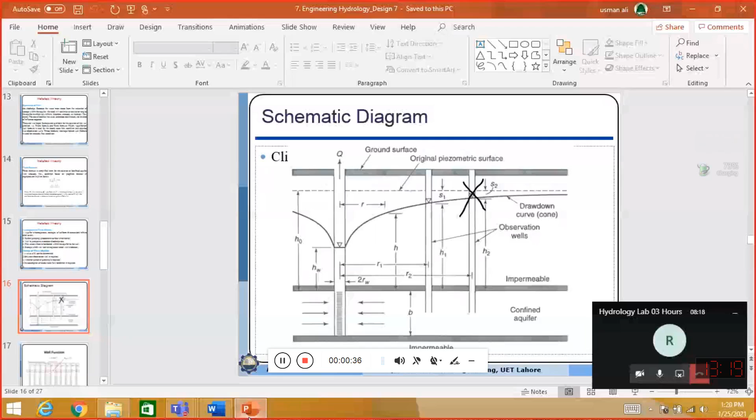Okay, so let us start with design number 7. Let me share the slides. Already these slides have been provided to you, so hopefully you have downloaded these slides mostly, and those who have not done it should do it at the earliest.

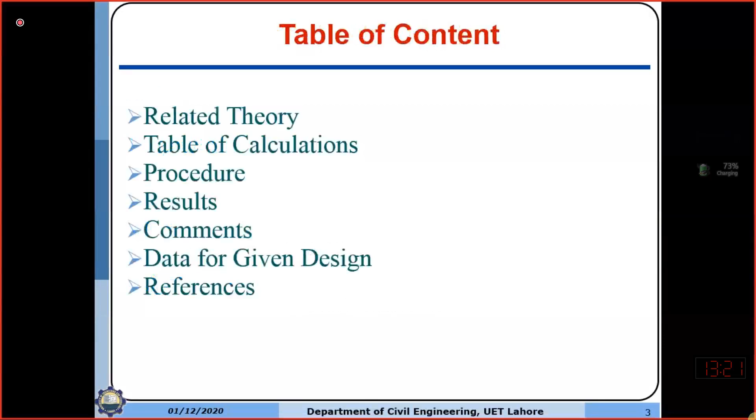Open design number 7 there so that things can be understood accordingly. Design number 7 is relating with groundwater hydrology, with different parameters of the aquifer and how to find those parameters. So the thickness of a horizontal confined homogeneous isotropic aquifer: homogeneous, having the same type of material all around, and isotropic means in different directions the properties are same, especially the seepage properties or perviousness; coefficient of permeability is same.

Of infinite areal extent is 30 meters. So a 30 meter thick confined homogeneous isotropic aquifer is given to you. A well fully penetrating the aquifer was continuously pumped at a constant rate of 0.1 cubic meter per second. So we are given the discharge of the well, constantly pumping at this rate for a period of 1 day.

The drawdowns in the table were observed in a fully penetrating well 90 meters from the pumping well. So drawdowns were measured in an observation well 90 meters away from the pumping well. Compute the transmissivity and storativity by using Theis method. We'll discuss first the related theory, and then move to the procedure and other things.

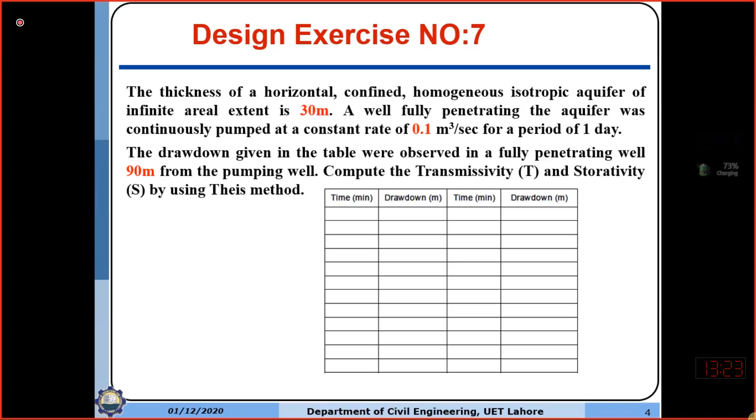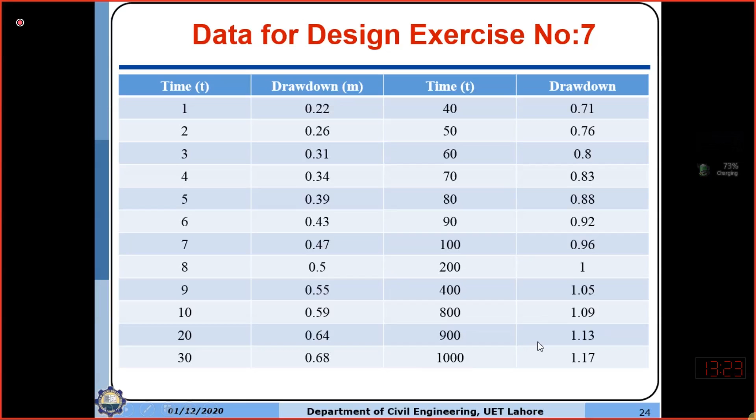So let me show you the data given to you. You are given the time in minutes and the drawdown measured in the observation well. Time in minutes starts from 1, 2, 3 up to 1000 minutes, and drawdown accordingly in meters. So this is the given data that we have to use for design number 7.

Now coming to the related theories. First of all, what is an aquifer? An aquifer is a water-bearing stratum or formation capable of transmitting water in quantities sufficient to permit development. So it is actually an underground reservoir of water, recharged by seepage from the top surface, from rivers, streams, water bodies, or rainfall that infiltrates. It joins the underground reservoir, which is called an aquifer.

So an aquifer has a sufficient water quantity available, and it also allows the movement of water. This is called an aquifer. Aquifers may be considered as falling into two categories, confined and unconfined, depending on whether a water table or free surface exists under atmospheric pressure.

In case of an unconfined aquifer, the top of the aquifer is at atmospheric pressure. It is not confined by a certain impervious layer. And in case of a confined aquifer, it is sandwiched between two impervious layers.

Storage volume within an aquifer is changed whenever water is recharged or discharged from an aquifer. So if you discharge water by pumping or any other way, or by natural means, the storage volume will reduce, and if you recharge from seepage, from water bodies and rainfall, the volume of the aquifer will increase.

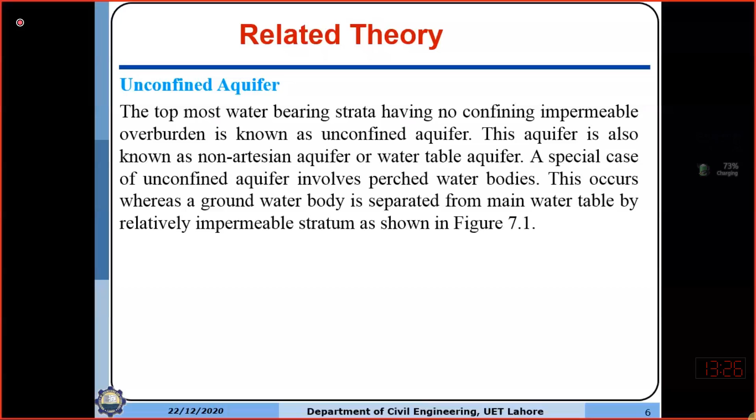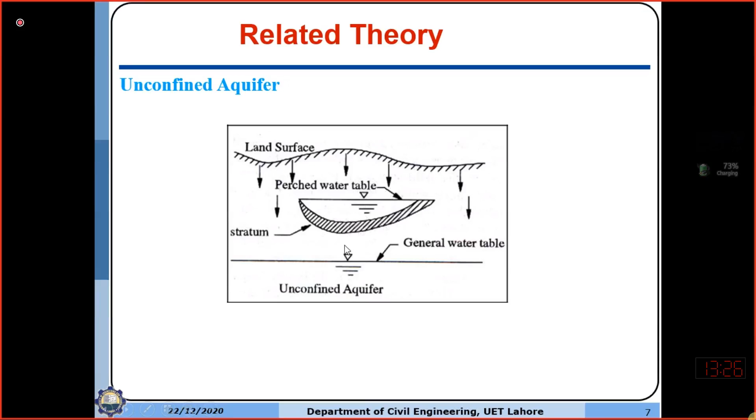Now sometimes it happens that between the main water table and the ground surface, there comes a local impermeable strata, like clay layers, for example. So some water is also stored above, which is not the main water body or the main aquifer. This is called a perched water table, which is a special case of unconfined aquifer.

Then confined aquifer: it is an aquifer which remains overlain by impermeable strata, or aquiclude, as we call it. Aquiclude is a layer of impermeable strata which does not allow any movement of water through it. The water is under pressure in this aquifer, and confined aquifers are also known as artesian aquifers.

So an unconfined aquifer can receive direct seepage from the top surface, topsoil, or ground surface, and a confined aquifer cannot receive direct seepage to recharge it. They are only recharged at specific points where they are open to the ground surface. There they receive recharge water from water bodies or from rainwater.

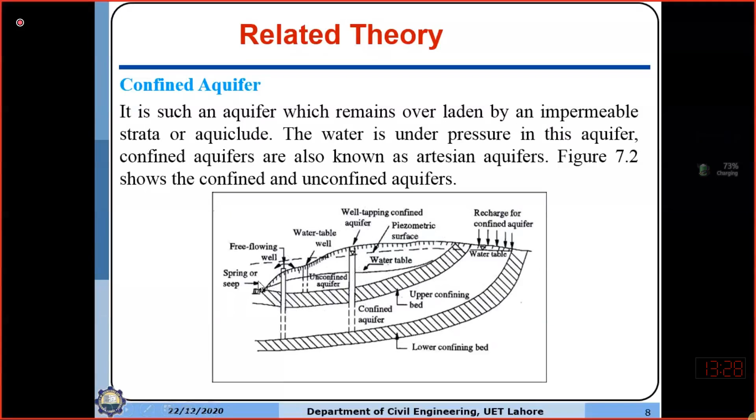Another thing: if you provide any well in an unconfined aquifer, the water level in the well will be equal to the water table. And in case of a confined aquifer, if you provide any well, the water level in the well will be at the piezometric surface, the under-pressure water surface. It can be any surface depending on the pressure. It can even be above the ground surface there. So these are the definitions of confined and unconfined aquifers.

Hydraulic conductivity. It is the discharge through a porous medium per unit cross-sectional area under unit hydraulic gradient. It is also called the coefficient of permeability according to Darcy's equation, that is Q = KIA.

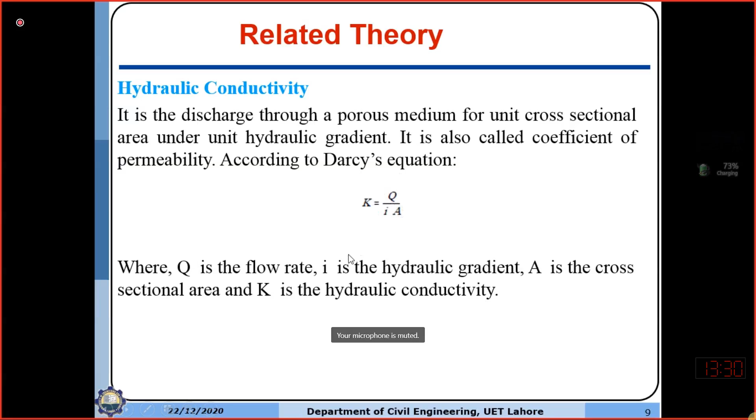What are the units of transmissivity? It will be cubic meter per second divided by square meter into B. So that will be square meter per second, or it is actually discharge per unit area per unit width of aquifer, that is called the transmissivity. So it is the rate at which water of prevailing kinematic viscosity is transmitted through a unit width of aquifer under unit hydraulic gradient.

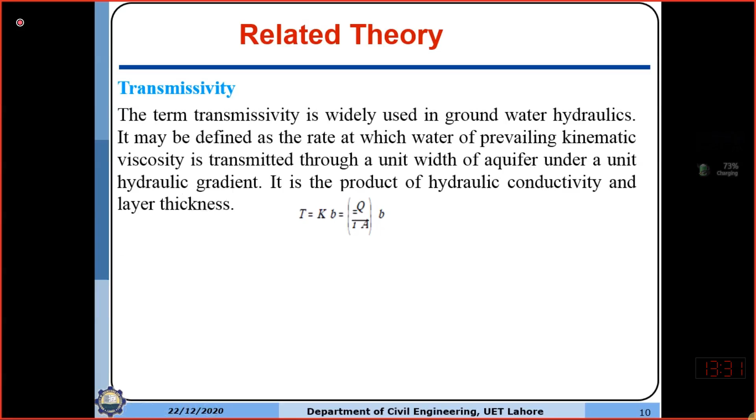Storativity or storage coefficient. A storage coefficient or storativity is defined as the volume of water that an aquifer releases from or takes into storage per unit surface area of aquifer per unit change in the head normal to that surface. So the storativity is defined as volume of water that an aquifer releases.

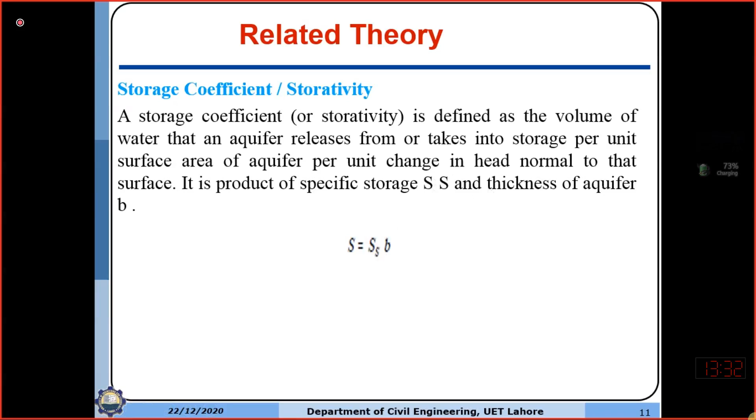For example, if you have some tank like an aquifer, what is the storativity of that? It is the volume of water which will be released from that tank under the change of unit head normal to the surface, per unit surface area. It is the product of specific storage, SS, and thickness of aquifer. What is specific storage? It is the volume of water that an aquifer releases per unit volume of the aquifer per unit change in the head normal to the surface.

So when we provide a pump in the aquifer, water starts getting out, discharge. So the area near the well has a drawdown. Water level goes down, and up to a certain area the influence of drawdown goes. That is called the radius of influence, and the lowering of water in the well is the drawdown in the well.

So whenever a well is pumped, water is removed from the aquifer surrounding the well and the water table is lowered. This lowering takes place in the well as well as surrounding the well. This depression is called the drawdown curve. All around the well there will be a drawdown curve, and in 3D it is known as a cone of depression. A drawdown curve shows the variation of drawdown with distance from the well. In 3D, the drawdown curve has a conic shape known as cone of depression. Also, the outer limit of the cone of depression defines the area of influence of the well.

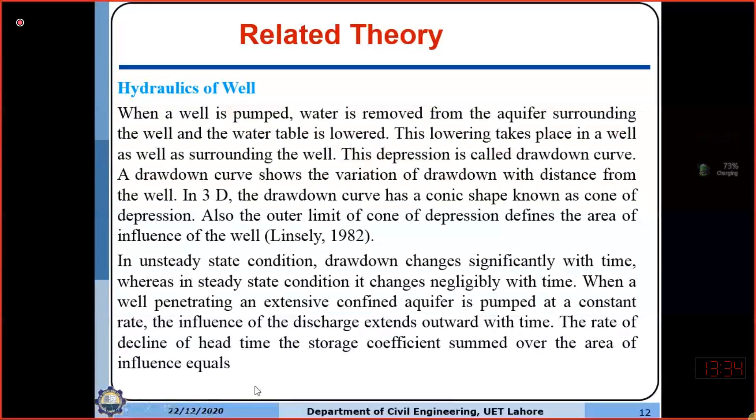In unsteady state conditions, when the discharge in the well and inflow to the aquifer is not the same, drawdown changes significantly with time, whereas in steady state condition, it changes negligibly with time. When a well penetrating an extensive confined aquifer is pumped at a constant rate, the influence of the discharge extends outward with time. The rate of decline of the head times the storage coefficient summed over the area of influence equals the discharge.

Because the water must come from the reduction of storage within the aquifer, the head will continue to decline as long as the aquifer is effectively infinite. Therefore, unsteady or transient flow exists. The rate of decline, however, decreases continuously as the area of influence expands.

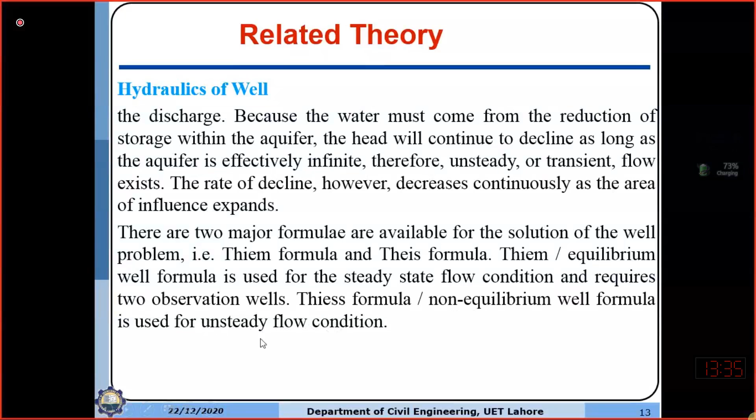There are two major formulae which are available for the solution of the well problem. One is the Thiem formula for the steady flow, and Theis formula for the unsteady flow condition. Thiem or equilibrium well formula is used for the steady state flow condition and requires two observation wells. And Theis formula or non-equilibrium well formula is used for unsteady flow condition and requires only one observation well. This is the Theis formula that you have to use.

In the manual, the equations are also available. So S over here is drawdown. You can say it is small s. So you can make the correction also in your manual. So the first equation involving S, let me read it out.

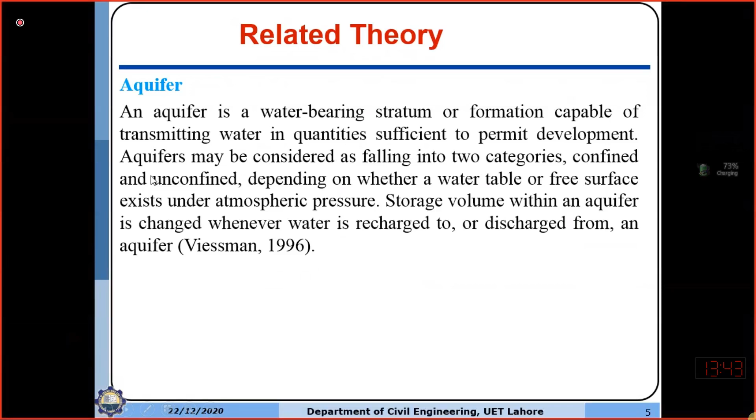You are also given the radius of the well, 90 meters given. Distance of the center of the main well to the observation well, that is 90 meters. So R is given to you, small r. So the first step is...

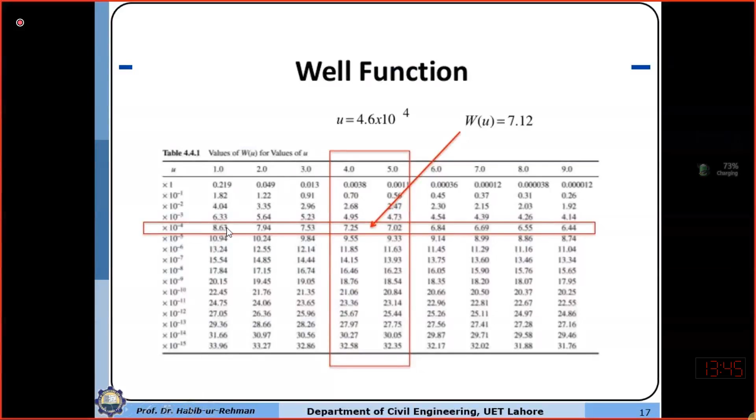ये थोड़ा सा पॉइंट जो है ग्राफ से बाहर आएगा, वो अप्रॉक्सीमेटली आप लगा लेना है, 10 तक है, 10.94 थोड़ा सा बाहर आ जाएगा. इसी तरह 1×10⁻⁴ पे वैल्यू लिख लें, तो 1×10⁻⁴ पे जो वैल्यू है वो ये है, 8.63.

इसी तरह 1×10⁻³ पे वैल्यू लिख लें, -2 पे, -1 पे. तो जो भी वैल्यूज u की दी गई हैं टेबल से w की वैल्यू निकाल लें, वो वहाँ पॉइंट लगा लें आप. Once you make all these points, just join them by a smooth line, so you'll end up having a curve like this, approximately.

So this is the type curve between w on y axis, and these are the values of u that you get from the table. इन्हीं वैल्यूज पे आप w निकाल के पॉइंट लगाते जाएं और इसको स्मूथ लाइन से मिला लें तमाम पॉइंट्स को, तो आपके पास एक कर्व बन जाएगा, that is the type curve. This is the second step that you have to make from the table, getting the value w against u, mark the points and then draw the graph.

So once you make this graph, next step of the procedure will be to draw another graph between drawdown s, and r square over t from the table 7.2.

ये आपने टेबल बनाया होगा 7.2. So draw a graph between drawdown and r square over t. तो इन दोनों के दरमियान ग्राफ बना लें. इसमें use करना है drawdown on y axis and r square over t on x axis. जस्ट लोकेट दोज पॉइंट्स, वो आपको दिए गए हैं, and draw another graph. ये ग्राफ भी अप्रॉक्सीमेटली एक सर्टेन शेप में आ जाएगा, कुछ इस तरह का।

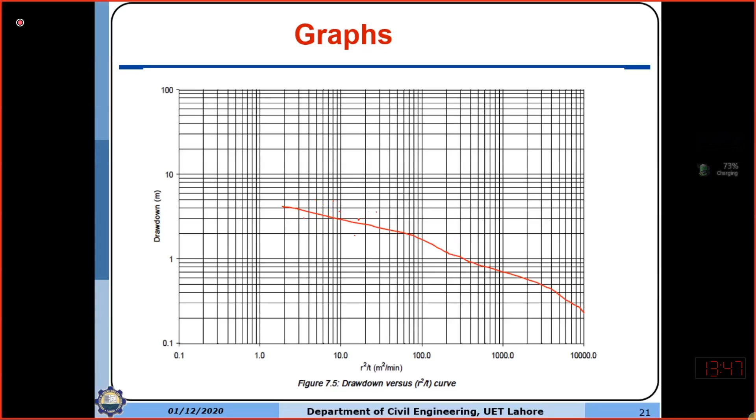So this you should make as a trend line, approximately an average line, क्योंकि ये जिगजैग सा ग्राफ बनेगा, तो इसको एवरेज स्मूथ कर्व बनाना है, मुख्तलिफ पॉइंट्स आएंगे. फॉर एग्जांपल आपके पास इस तरह का कर्व आ सकता है। पॉइंट्स मुख्तलिफ जगहों पे आ रहे होंगे, जैसे ये पॉइंट आ गया, यहाँ आ गया, यहाँ आ गया, तो इनका एवरेज आपने एक लाइन लगानी है. एक्सेल से भी आप इसमें हेल्प ले सकते हैं. So this is the second curve you have to make.

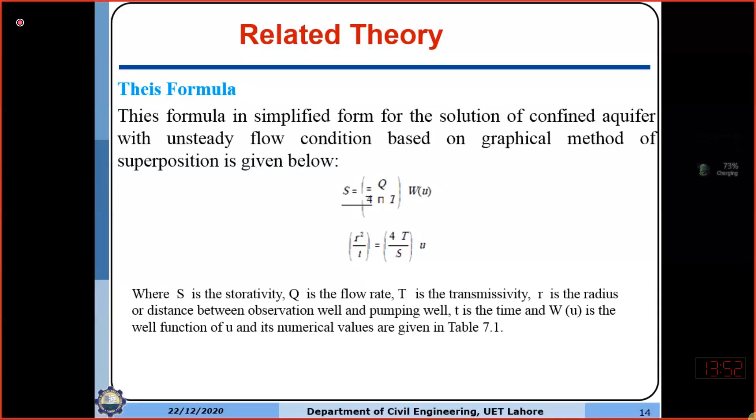You have to attach the butter paper with the design as well. मैनुअल के साथ बटर पेपर को भी आपने लगाना है, जब आप जमा कराएंगे मैनुअल ये लेके आएंगे, वो भी साथ अटैच होना चाहिए। At the end you will write the procedure, आपने खुद से लिखना है, मैंने बता दिया है। Again I will repeat the procedure.

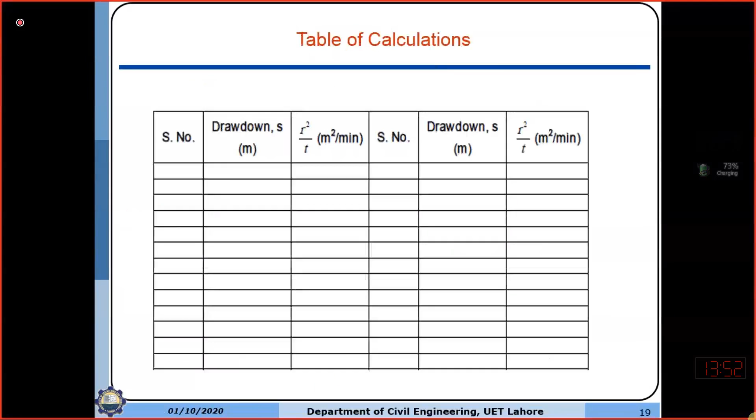Find out R square over T, draw the type curve between W and U, draw the drawdown curve between S and R square over T, then shift the drawdown curve on the butter paper line and the axis and the values, and then take that graph butter paper to the other graph and try to, keeping the axis parallel, try to achieve overlap of the two graphs.

Select the match point, and corresponding to the match point find the values of U, W, S and the R square over T, and using the equation find T and S.

You will just show the calculations over here in the results. You will show the values, you will show the match point कितना आया है, उसके corresponding जो values आई हैं क्या हैं, और T और S की value यहाँ show कर देंगे। You have to comment accordingly about the values.

So this is how you will complete design number 7. Now I will move to the question answers from design number 7.

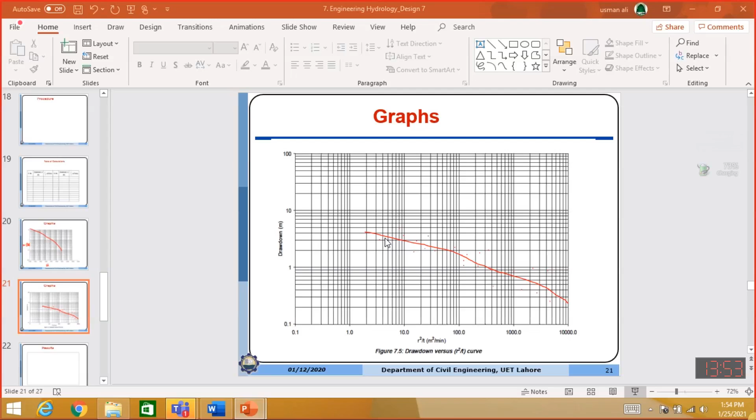Anybody having any question? Yes. Any questions from your side? ये सबको समझ आ गई है? मैं बाद में जब अटेंडेंस लगाऊंगा तब पूछूंगा अभी, क्यों भी CR समझ आई कैसे करना है ये? Yes, sir.

जी, any other person who has any question from today's design 7? तो इसको कंप्लीट करना है आपने। नेक्स्ट टाइम वाइवा होगा और फिर आपके पास कुछ टाइम है उसको कंप्लीट करने के लिए, और जब आपकी साइकोमोटर असेसमेंट होगी उसके दौरान आपने इसको लेके आना है कंप्लीट करके सारे डिज़ाइन को। यस, एनीबडी एल्स हु वांट टू हैव एनी कमेंट ऑन दिस टुडेज जॉब?

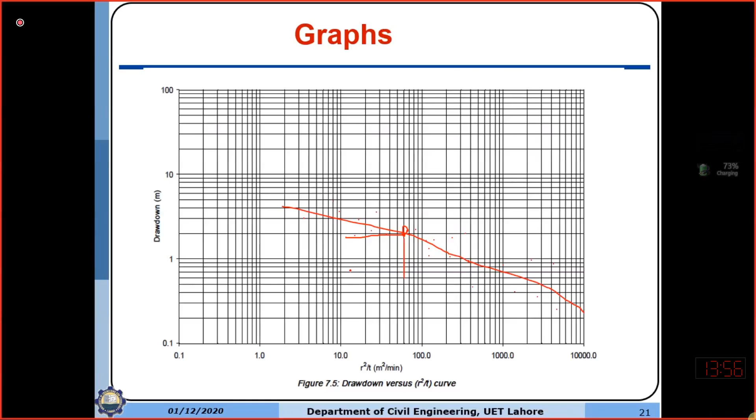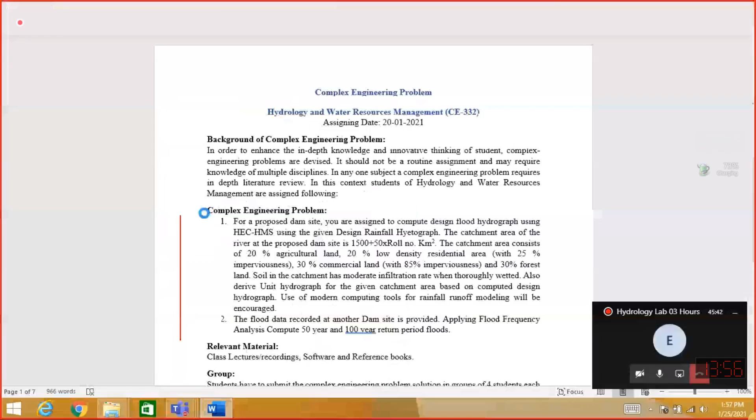Then I will move to the software that you have to use. So this is the complex engineering problem that is assigned to you. So you have to compute the design flood hydrograph using HEC HMS.

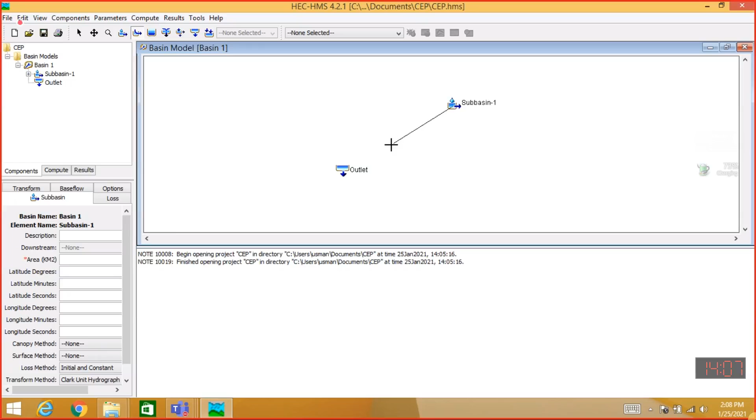But before connecting it, I have to show the reach element. I will go to the reach creation tool, go to the sub basin and click it, and then go to the outlet and click it again. So it will ask me the reach name. You can give any name, maybe river Ravi reach 1, reach 2, whatever, or I will keep it as it is, reach 1.

So now this is the complete model you have to make. Under this basin model, you have to show the basin and then the elements of the basin: sub basin, outlet and the reach. And then I will go to the basin and say connect downstream to this outlet. So now it will show that sub basin is connected downstream to the outlet. I can also connect the reach downstream to the outlet. So now this completes this first basin model.

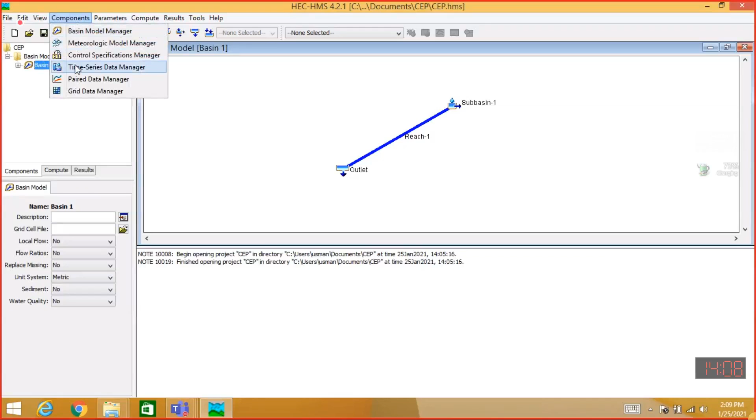Now the second component that you have to show is the time series data manager. You will press it, and it will ask you what type of time series data you want to create. So we have the precipitation gauge, for example, we have a rain gauge whose data is available. It will ask you the gauge name. I can say it is gauge 1, so I will create it. So it will create time series data.

Under this time series data, if you go to the precipitation gauge, gauge 1, it will ask you about the description of the gauge, and manual entry. So we're going to enter it manually, and incremental millimeter, you will keep it as it is, and the time interval. You are given the data in hours, so you will give the time interval as hours. Then save it. Then go further under this gauge 1.

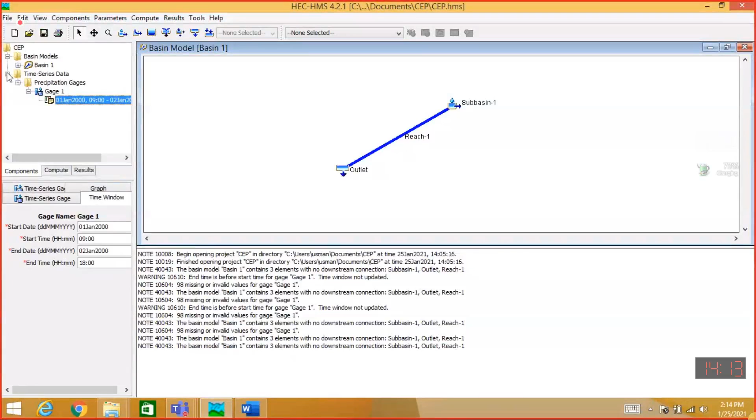So I can show you, this is also shown in the graph. This is the hyetograph actually that I have provided. So this will complete this time series data. Then the next thing will be, I will save it. Next component that I have to add is the meteorological model manager.

I will again click it. It will ask you the name of the met. I will say met1. I will create it. So under this meteorological model, I will go to met and then specified hyetograph we have given.

So first of all, I have to go to this met1, click met1, and it will ask me to give a description of this. And other things, you will keep as they are. Just precipitation is a specified hyetograph that you have to select. And then I have to go to basin. I have to include this basin. I have to say yes.

So I have to include the sub basin in this meteorological model, and I have to save it. This is the thing that I mainly have to do. And then I will go to the specified hyetograph, and I have to also insert this gauge 1 under this sub basin 1, and again I have to save it.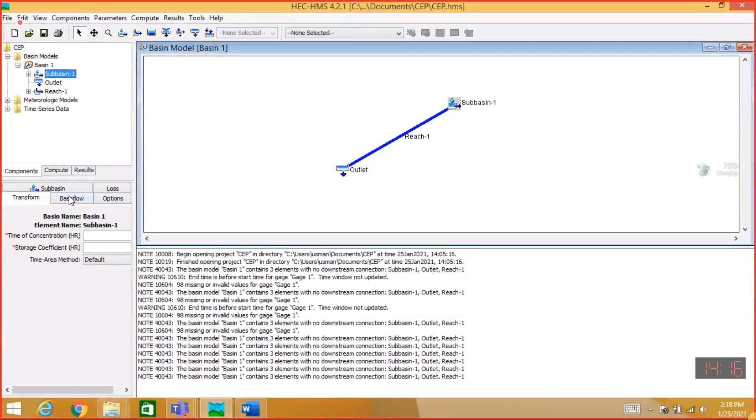So this is how you will fill all the values over here. For example, let me fill these values. For example, I say initial abstraction is say 1 millimeter, curve number, average weighted, is 70 and imperviousness say it is 50%. ये मैंने assume value ले रहा हूँ, आपने अपने मुताबिक values डालनी है इसमें. तो ये मैंने पहली values डाल दी, सेव कर लिया.

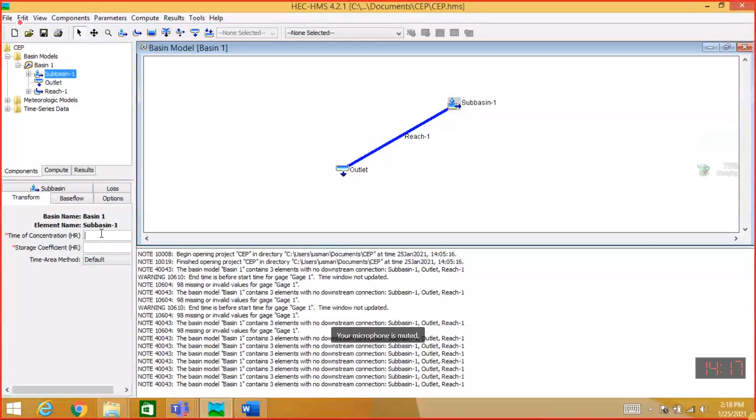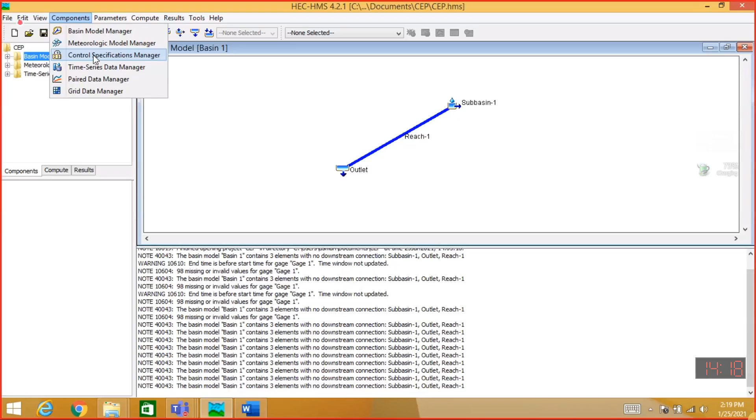So this completes our basin model, and next I have to create the control specification. I will click here, it will ask me new, so I will say it is control 1, so it will be created. I will go to control specification. It will ask me to fill from what time to what time I want to do the analysis or simulation. तो मैं वही टाइम रख सकता हूँ जो मैंने वहाँ दिया था. स्टार्ट डेट that was 1st January 2000 I think, and the start time was 9 AM. तो आप इसमें फ़र्क भी कर सकते हैं, लेकिन बेहतर है वही रखें जो आपने वहाँ दिया है. You can keep the same time as you have given in the time series data.

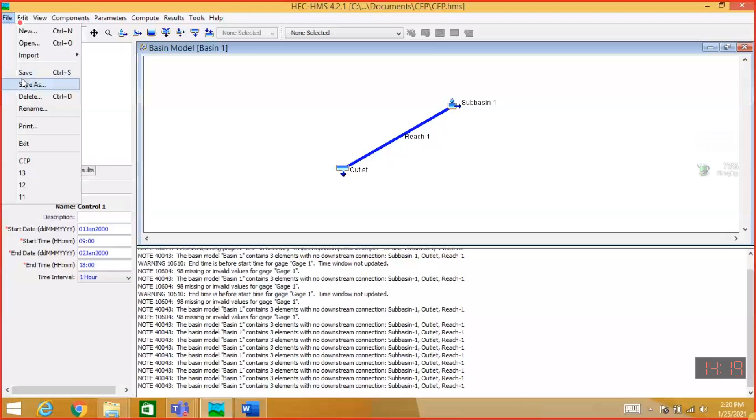End date was 2nd January 2000, and end time was I think 18 hours exactly. And time interval you can keep as it is. This is the computational time step, so I can again keep it 1 hour. I can save it. Then I have to go to compute. I will create the simulation run. I will just click next, and it will automatically include these things. Finish. Then I will go to compute for the simulation run, right click on this and compute.

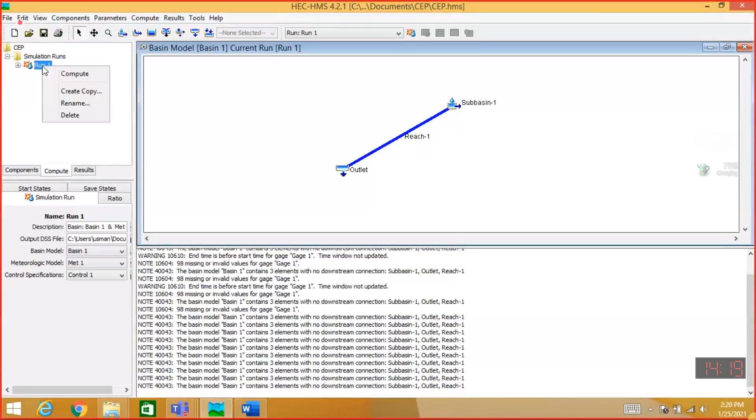So due to some reason, it will give you no area set for the basin. I have not given the area for the basin, so let me give the area.

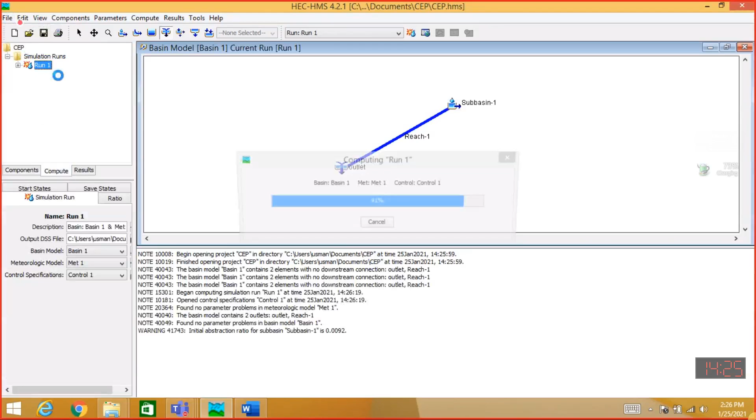This also needs to be connected to the outlet, then you have to run it again, so that the discharge appears at the outlet. Let me see again. The discharge at the outlet should appear. The reach also needed to be connected. Yes, now the discharge is available at the outlet. You have to connect the sub basin to the outlet and also reach to the outlet.

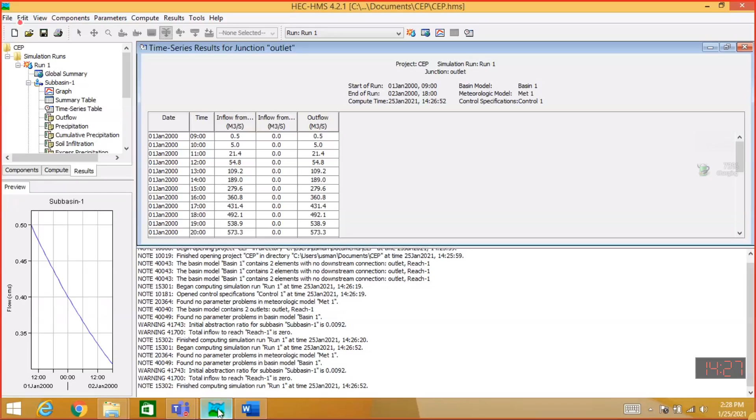जिसने इंस्टॉल नहीं किया वो पहले इसको इंस्टॉल करे। इसके लिए आप टेक्निकल मैनुअल पढ़ें, खासकर जो मेथड्स यूज़ करने हैं, लॉस मॉडल, ट्रांसफॉर्म मॉडल वगैरह। इसमें क्विक स्टार्ट गाइड है, उसे क्लिक करें, उसमें एग्जांपल भी दी हुई है जो आपको स्टेप बाय स्टेप सॉल्व करनी है।

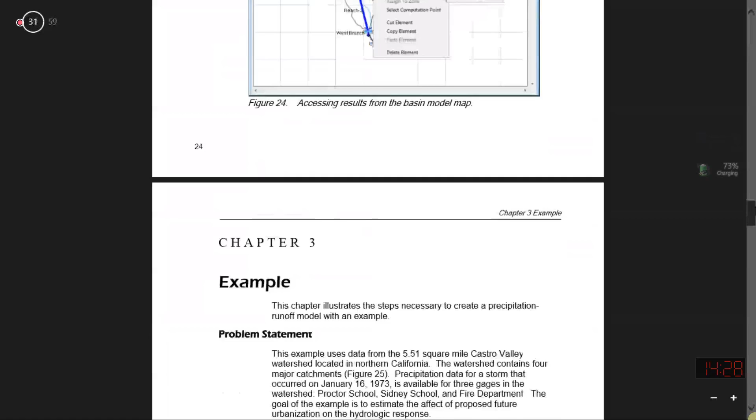ये रिजल्ट्स हैं इसके, ये एग्जांपल आपको करने की कोशिश करनी है। आगे के स्टेप्स भी दिए हुए हैं कि इसको कैसे करना है, विंडोज़ के साथ सारे स्टेप्स दिए हुए हैं। So you have to perform this example and then you will be able to proceed. This is a slightly difficult example, we have an easier one to do.

So that you have to complete. Yes, any question from your side?

Okay, let me start with the attendance, and I will ask individually, you should respond by your roll number, that have you completely understood today's lab and the other things, and what is your progress of the previous jobs? Have you done it or not? And are any other query relating to the evaluation, other things you can ask.